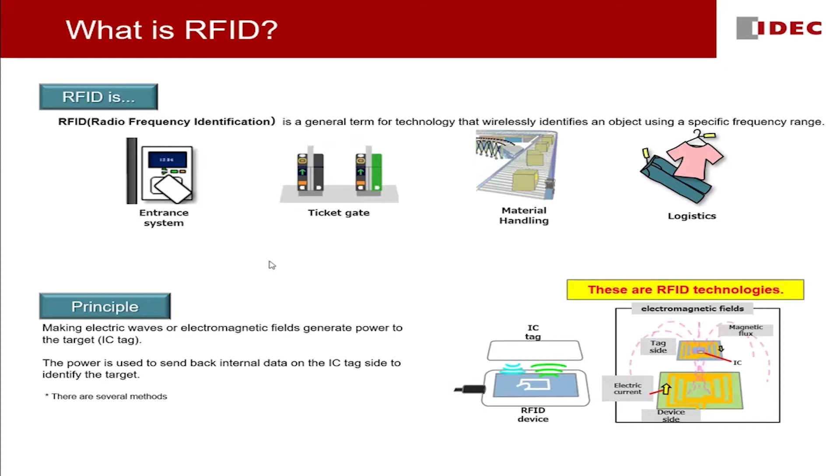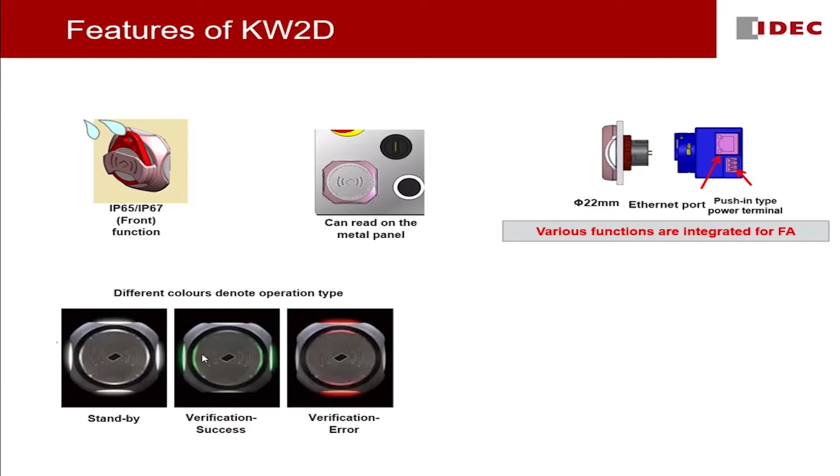The fourth feature is we have LEDs indicating the status of KW2D, that is whether it is on standby mode, or if I'm trying to place the identification tag or the RFID tag, it actually shows us the result whether it's a success or if there is any error. And it can be integrated with various factory automation products such as PLC and HMI with the help of the protocols which we have.

Coming to the specifications of KW2D, it comes in two models: one is holder type, the other is normal type. Holder means we have a dedicated kind of RFID tag, that is a key fob, that can be placed here for quite some period of time to identify the authority level of that tag.

The rated input voltage is around 24 volts DC with a power consumption capacity of 2.4 watts. It supports both types of cards: normal ID card and key fob card. A normal ID card can be sensed at a range of 0 to 15 mm, as well as the key fob type card can be sensed from 0 to 5 mm.

Communication protocol supported includes Modbus TCP, Ethernet IP, as well as CC-Link IE Field Basic. All these protocols work on an Ethernet base, so the connector will be of LAN cable, that is RJ45. Panel cutout is around 22 mm as we have seen previously. The dimensions are also of quite good range with respect to the front side or from the panel back end side.

Degree of protection is 67 from the front, altogether it's 65. We have a good range of mechanical performances as well with respect to temperature, humidity, pollution degrees and so on. Coming to the IEC standards, we are quite available in a few respective fields.

Coming to the specifications of RFID, I am just mentioning the supported tags or cards which can be detected by the KW2D RFID reader. These are the 4 types of RFID tags which can support our RFID reader. If you look at the communication speed, type A supports a speed of 106 kbps reading speed, while type F of this specific standard supports a speed of 212 kbps. Carrier frequency is around 13.56 megahertz.

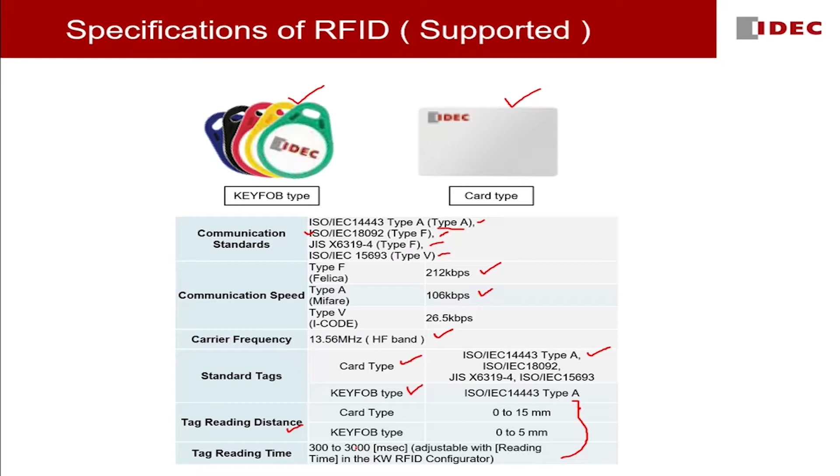Moving on to the configuration of KW2D with Ethernet IP, this is our major topic today. Ethernet IP stands for Ethernet Industrial Protocol. It works on an industrial multi-vendor network that uses Ethernet. So if you have an Ethernet port and it supports Ethernet IP, we can configure different Ethernet devices which support Ethernet IP.

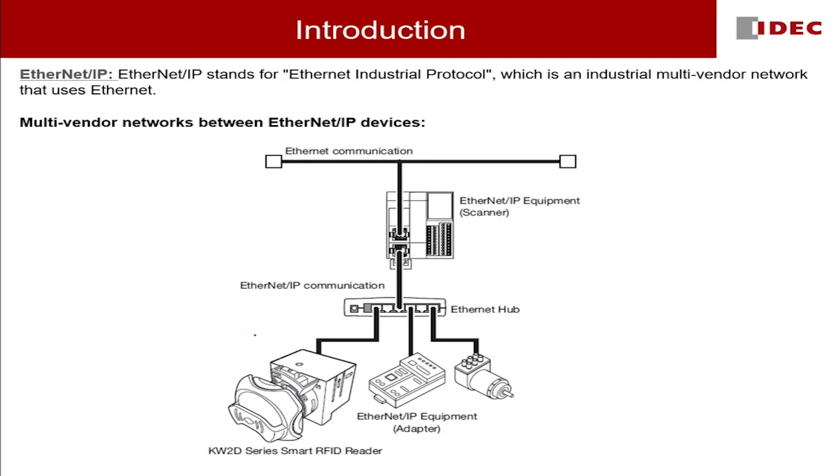So we will be going on through the practicals on IO communication function. As I mentioned, there are two methodologies with Ethernet IP adapters support, that is IO message communication target, which acts as target in our case, and the other methodology is class 3 UCMM communication.

Speaking of IO message communication function, it's a function that allows Ethernet IP devices to cyclically read and write data with each other. The target unit for reading or writing data is called a CIP connection point. Cyclically means it tries to read the data to and fro without any interrupt, meaning it's not a transient kind of communication wherein we have to give a signal to read or write the data. It actually does automatically.

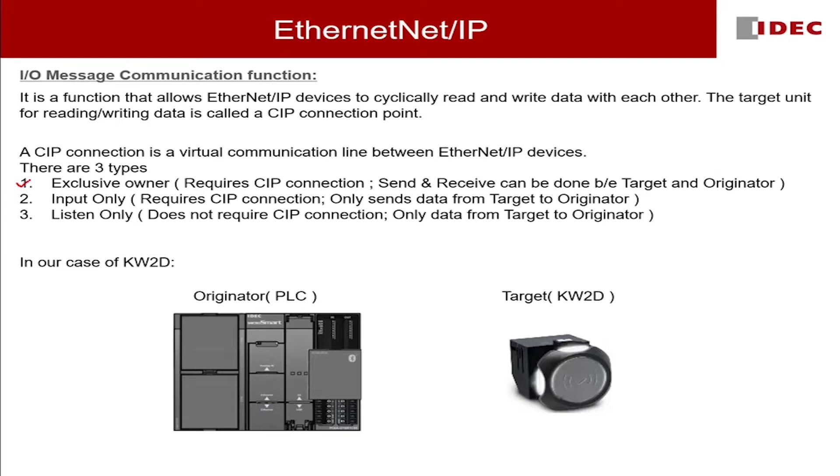In input only, if the originator PLC tries to read the data, it cannot send data back to the KW2D. Even in the case of listen only, we can only read the data from KW2D; we cannot write any command to the RFID reader. So in our example, we'll try to execute exclusive owner, which reads and writes the data to the target.

Coming to the memory assignment, we have to understand what kind of data can be transmitted or received from KW2D. As we have seen, the KW2D RFID reader is acting as a target, and here we are trying to receive the data. If we are programming in PLC, input assembly means the data is being transferred from KW2D to the PLC, meaning PLC is reading the data sent by the KW2D RFID reader.

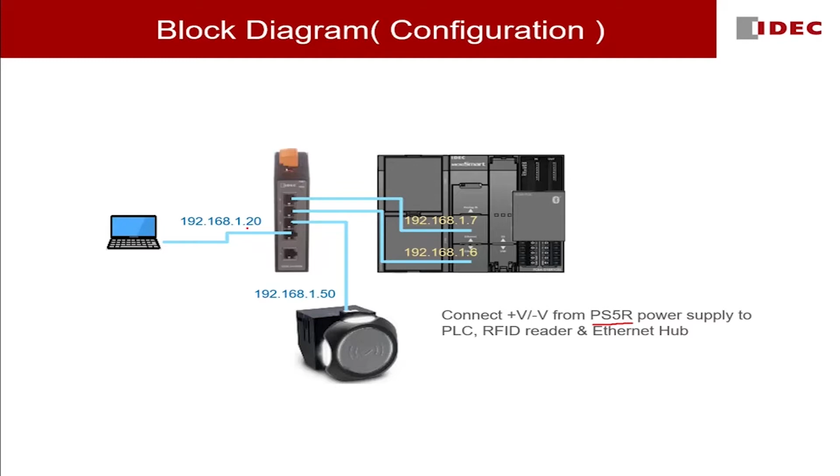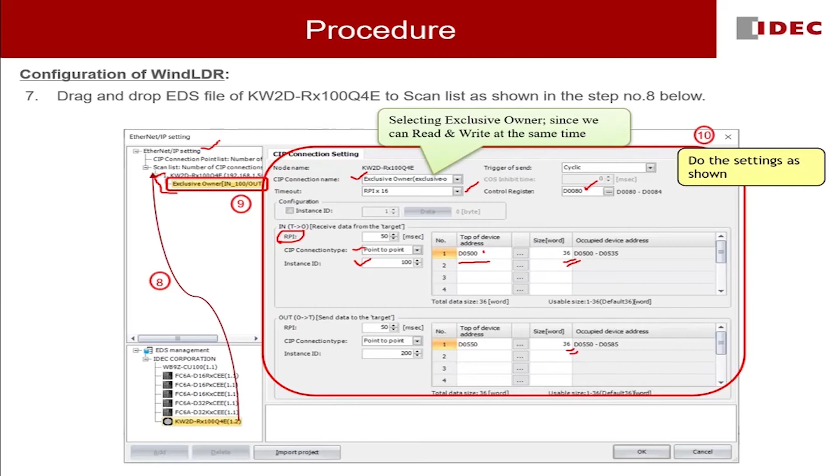So after doing all these settings, we have to click on Ethernet IP settings here, and check mark on 'turn on Ethernet IP communication bit automatically.' Once the communication is done between KW2D and the PLC, it actually turns on Ethernet IP communication. So this checkbox has to be checked, otherwise I will not receive any data from KW2D because Ethernet IP is not turned on.

So once we are done with everything, click OK for the Ethernet IP settings window as well as for the function area settings window, and then download the settings we have done. Since we have set the registers for KW2D reading and writing, 500 to 535 and 550 to 585 - the first is for reading the values, this is for writing the values.

So as a testing, we can go with batch monitoring or custom, wherein I was trying to execute the employee ID tag. I have read that, and as you can see, the UID 9255BDB2, which you can see in these registers, register number 507 and 508. If the tag length is quite big, then maybe it will go till here.

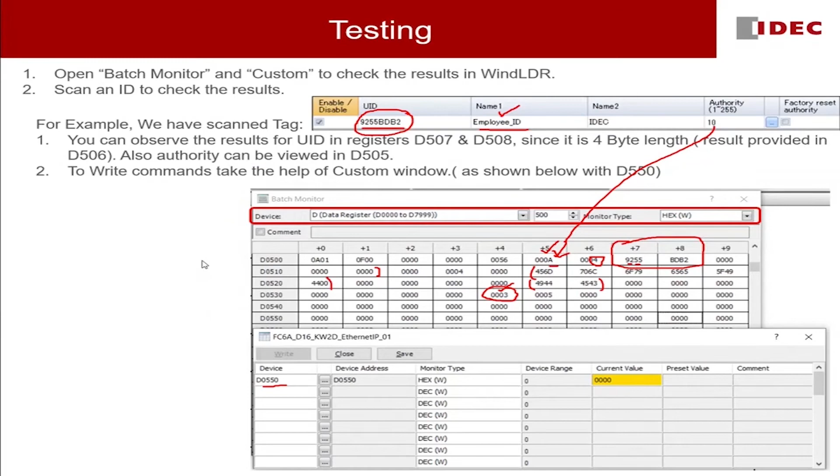Right, so let me just open the RFID reader in the configuration window first. Then maybe again we'll jump on to the configuration of KW2D with the Modbus TCP. So initially I'll be opening WindLDR as well as KW configurator.

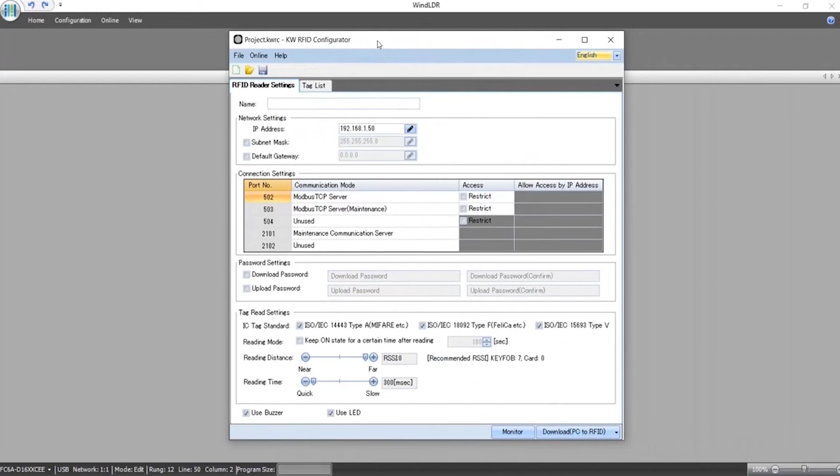Right, so let us set KW configurator first. So write some name - I am giving some name to it, EIP, the same name which I mentioned over there. By default, the IP was set as 1.50. I think we should go with new project. Nope. Okay.

But this is not a mandatory part to write name. Then we are going with Ethernet IP, right? Adapter. Click on this.

I will try and hold the data for 5 seconds. So I have written 5 seconds data, sorry. Then use of buzzer. Whenever I try and access the RFID reader, the buzzer will glow, and the LEDs will show its data. If green LED is shown, that means the RFID tag read is successful. If red is shown, that means tag read is not successful. That means it should present in the tag list.

So right now we do not have anything, but in detail it has some tags inside that. So what we can try and do is go to monitor once, 192.168.1.50. My PC's IP address is set to 1.20 initially before starting this presentation.

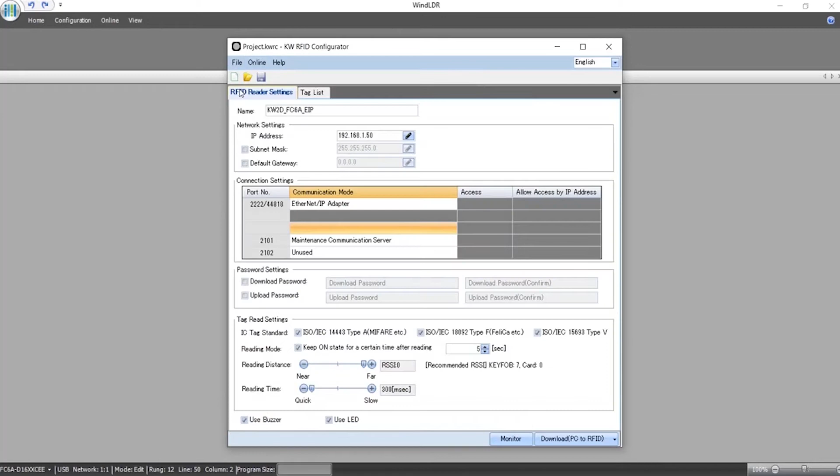So my IP address is 1.20, and the RFID reader IP address is 1.50. Initially I have said that if it is not set, we have to go online, upload the data from RFID to PC, check what is the IP address, change the PC address in line with that, and do the necessary settings, then write it back if the IP address is different. In my case, the IP address is set previously as 1.50, so I don't need to do anything.

So go to monitor, click the proper IP address for the RFID reader, click on connect. It says some data is present. I'll say no. So right now I am sensing one tag of green. So this is green tag, it's already present, so it will show the data.

Its name. This is yellow, and authority levels are already set in the reader, so it will show. Otherwise, what we need to do, we have to reset it once again. So there's one more tag, maybe I'll try and read. Okay, this is employee ID, which is already present. If these are not present, you'll not be able to see the authorities or names which are provided here.

So once all these are done, click on save registered UID tags. Otherwise, I'll do one thing, reset the IP factory settings. 192.168.1.50. Execute.

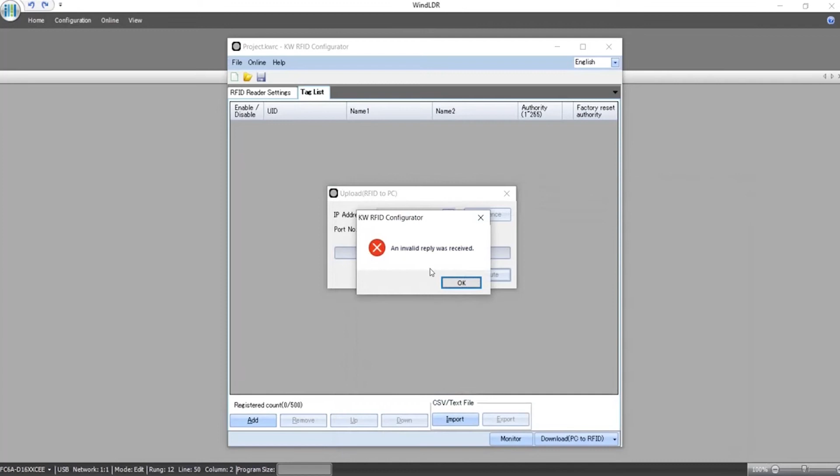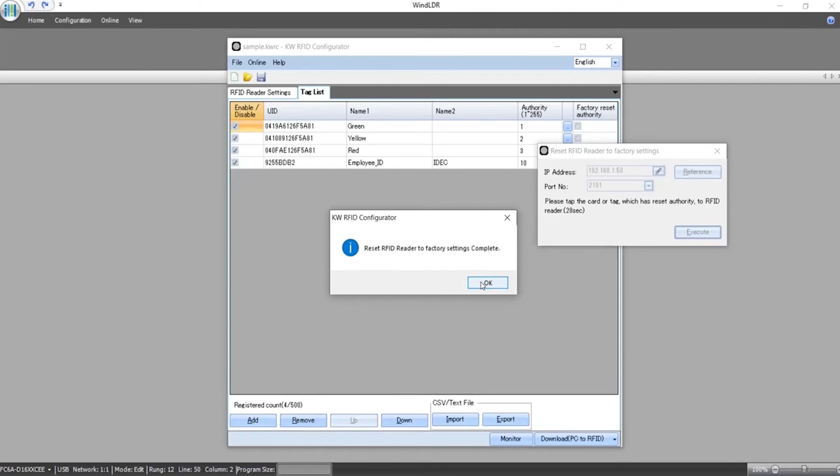Okay, so factory reset, actually I kept it as red. That has to be changed, that has to be configured here. So reset factory settings, execute. Okay, now it has come to factory reset settings. Everything is back to normal.

So I'll try and reopen KW configurator, or else I would have gone for new file, new project, KW2D. Right, so 1.50 is the IP. Maybe I have to change it to Ethernet IP.

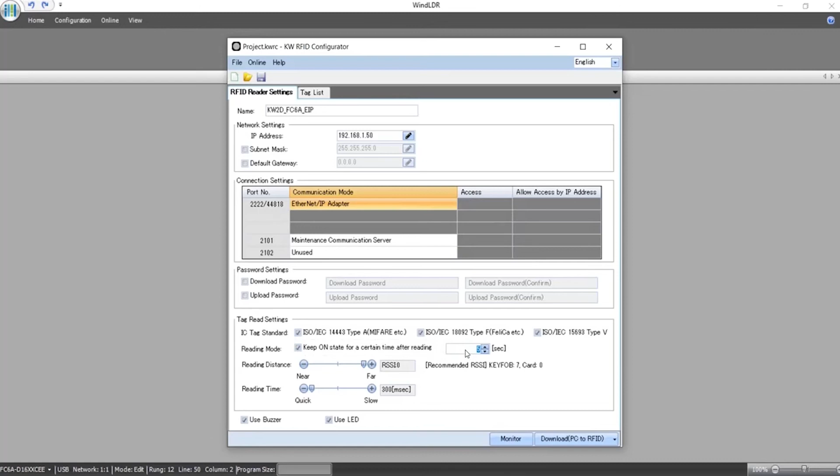Then 5 seconds, use buzzer. Maybe I'll use the buzzer. Since no tags are available, monitor, connect. So by default, the IP address of the RFID reader is 1.50. So I'll go with green key fob, then yellow,

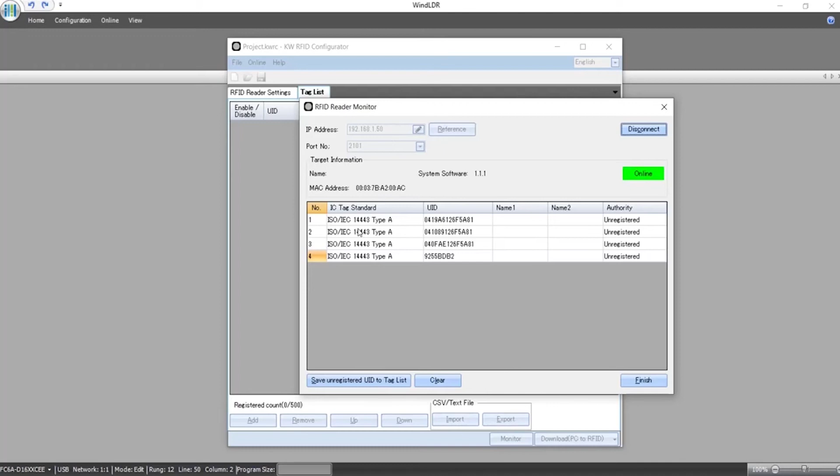okay, then red, and then the final tag, it is employee ID. So since these are not registered, save the tag. Yes.

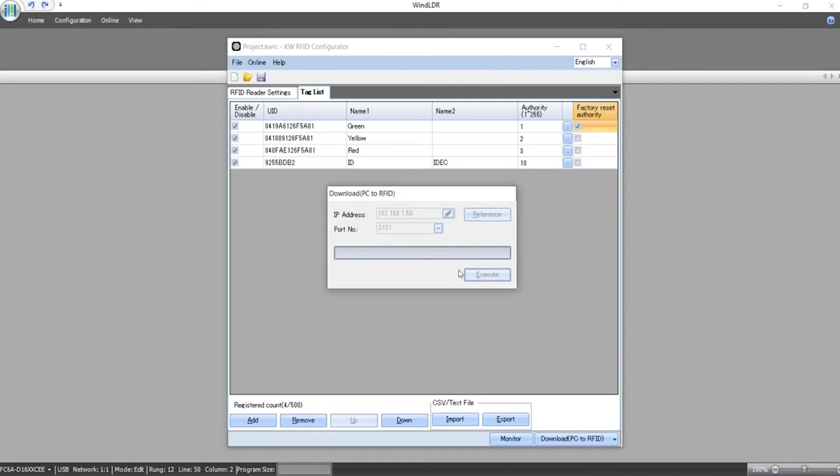Okay, for factory reset, again we have to give some tag authority. Maybe I'll give it to green, so that whenever I'm pressing factory reset, the authority who is having the green can only do these factory reset settings. So once these settings are done, click on download either from here or from here. Okay, all settings, execute. Okay, done.

Then now these settings are done, so we'll move on to the WindLDR. So in that, close it, go to the selection of PLC, select the necessary PLC over here, right? So I'm going with FC6A-D16XXCEE.

Then you have to go to the configuration window. We have to click on Ethernet IP1, Ethernet port 1. Settings, maybe we'll go with the same settings which you have done in the presentation. 192.168.1.7 for Ethernet port number 1 and 1.6. Okay. And finally check on Ethernet enable, configure.

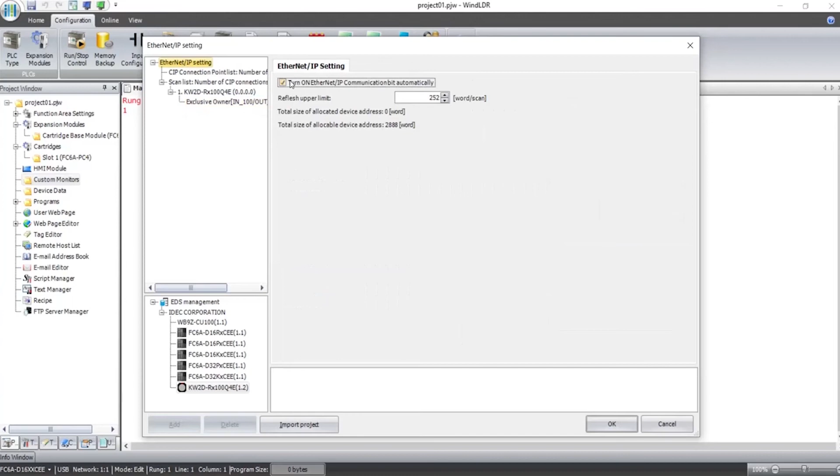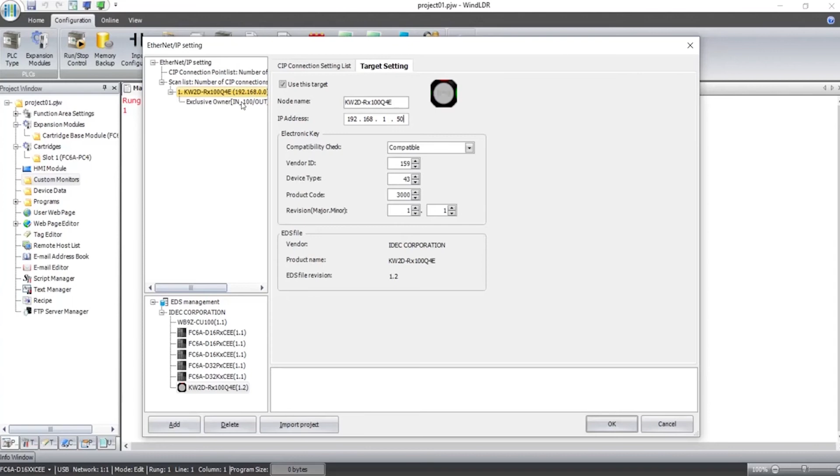Drag and drop the KW2D from here to scan list. Initially we have to turn on the Ethernet IP communication and go to KW2D, the exclusive owner over here, KW configurator settings. So here, which I forgot to mention in the presentation, we have to mention the IP address 192.168.1.50 for KW2D reader. Then exclusive owner, by default it's exclusive owner, so it has 100 and 200. If you are going with input only, it will change automatically, we don't need to do anything else.

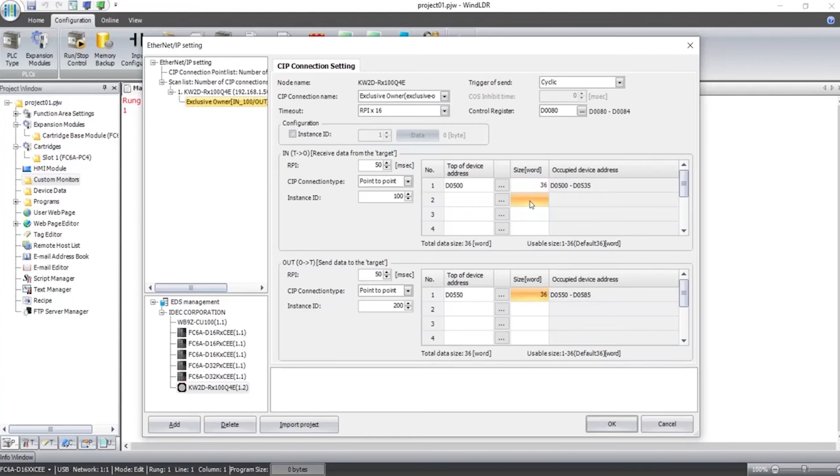So I'll go with exclusive owner, cyclic, maybe some register D80, the same one I've taken in the presentation, D500, D550, altogether maybe 36. Same value has to be entered here, 36. I'm taking all the register. So click on OK, OK, and we can download the data.

So I'm using communication as a USB here for fast communication. Otherwise, we can go with Ethernet also. You can specify which port we are going with. So okay, I'll try and use the first port.

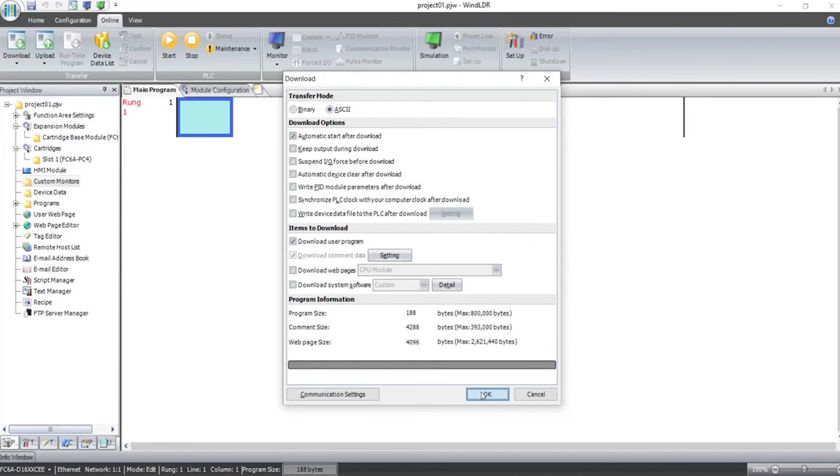Okay, it's transferring the data to the PLC. It's downloaded successfully. Let us go and monitor now.

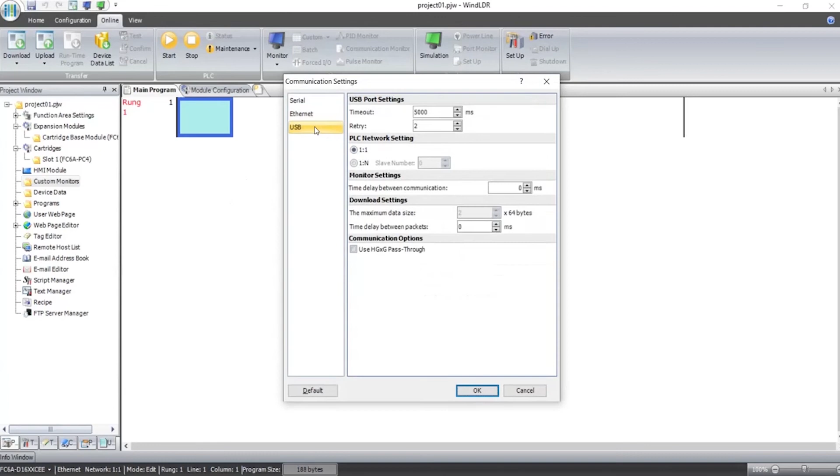So first, for fast monitoring, I'll do one thing. I'll change the settings to USB. My PC is also communicating with USB. So let us check the register D500.

I'll be scanning the employee ID tag which I have. You can listen to the sound. It's a 4-byte, 9255BDB2. Let me just take it out. After 5 seconds it comes back to normal because I have given a time of 5 seconds.

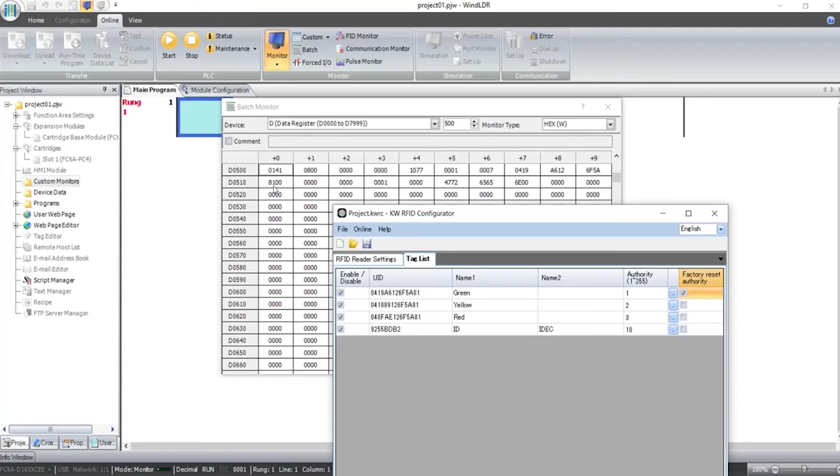Let me just put in the green tag key fob. It has 7 bytes, 0419 A6. You can see here it's the same number, 0419 A6126F5A81, a 7 byte value. Maybe you can do the programming to take only 7 bytes. So I have taken the key fob out from there, and it has come back to normal.

Let's say we write some value into it. The register which we took was D550, right? So now what we need to do is I need to enter the hex register value of that.

I'll go back to the PPT once again. Let me just check what we can do. I'll try and stop the RFID command, that means it will not read any value. So let me just click and write one over here.

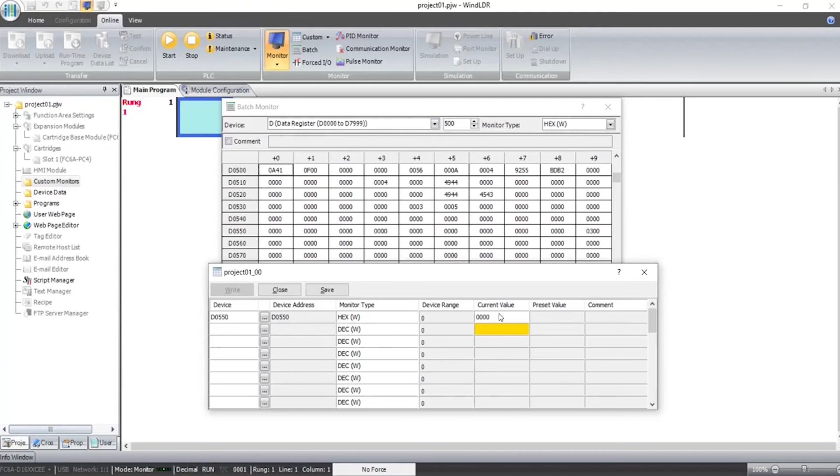So I'll put the tag on top of the RFID reader. As you can see, there's no value coming up here. Let me just put the tag there in the same way. Now the tag is on top of the RFID reader in front of it, and it's reading the value. You can see even the name as well here.

So to check the name, we have to check the ASCII ID, and here at 525 we have ID EC. This is the register which we have. This is going in line with the registers which I have shown you here. 15 to 23 is name 1, 25 to 33 is name 2.

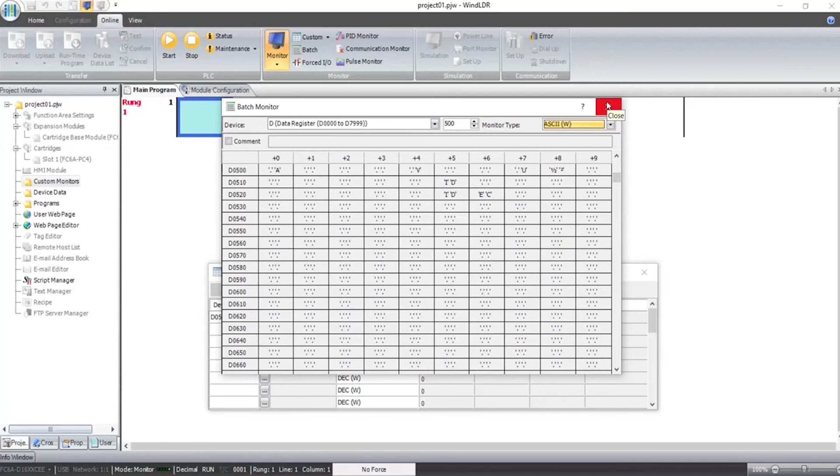I think that is done for Ethernet IP. The remaining configuration, the PLC programming can be done, because once we have received the data, we can play along with it. So let us move back to the presentation.

For the Modbus configuration, it's quite simple for Modbus TCP. The requirements are the same as we have seen earlier. IP addresses are also the same. Settings are also the same with respect to KW2D, but the only thing is we have to change the communication settings of Modbus settings to Modbus TCP server, and the remaining settings which we have done in the Ethernet IP are the same. So if someone's referring to this specific video, maybe they can go a little bit backward and check the KW2D configuration, how we have done that.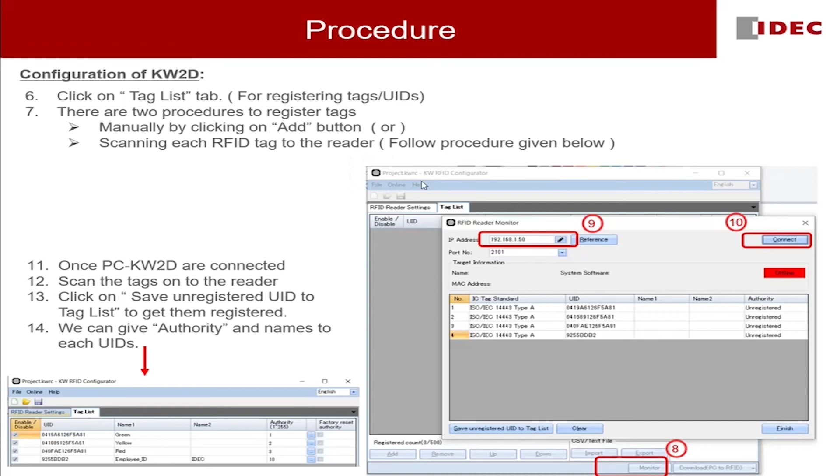In the PLC also, the configurations are quite the same till step number 5. In step number 6, we have to open one more selection called communication settings. Once the communication settings has been opened, there we need to click the first connection, set it as Modbus TCP client, and click on configure. Once we click on configure, a window will open wherein we try and set the functionality codes as read the status or write the status.

This is actually writing of status, not reading of status. I'll change it in the example which I'll be showing later. After that, we have to set all these as per what is mentioned here - bits and words, how many bits and sizes: 32, 16 and 32. These have taken all the bits and words which are mentioned in the manual. So I'm targeting all the bits and registers which can be read or written to the KW2D.

So again, Modbus slave address we have to set as per the read input status, write input coil status, or reading input registers. According to that, we need to set. So I hope whoever is using Modbus TCP, if you're trying to read with KW2D, definitely you have to go with these settings only. Then slave number is 1, we have only one slave, and the host we have to set, that is our host is KW2D because we are setting from PLC.

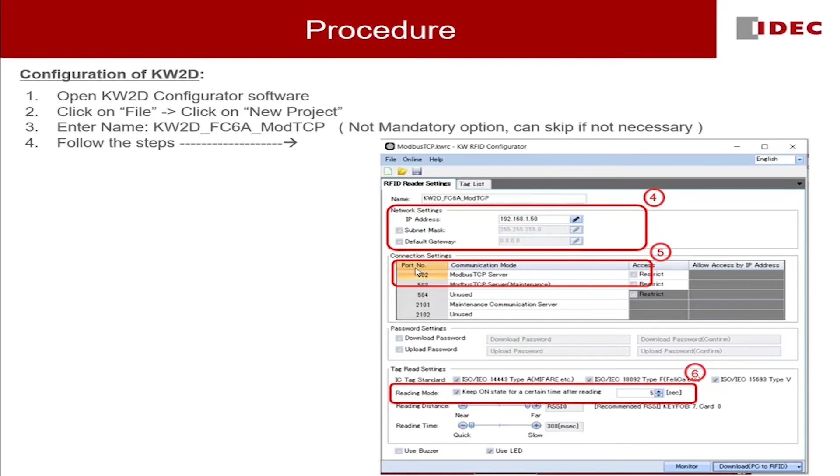Modbus TCP actually communicates from Ethernet port number 1, so we have to set port number 1 with the KW2D IP address. Port number I'm not changing here. For the host, port number is 502, which you can see here in the KW2D configuration. By default, port number comes as 502, so we have to write down the same port number.

Okay, just after doing all the settings, click on OK. Enter the IP address of KW2D, and finally click OK, whichever window is open, and straight away go online and write the settings back to the PLC.

For monitoring, as we have taken M0, M50 and M100, so as you can see here, for reading the inputs and writing the coils, it's actually write. We have to take a different functionality code over here to write. I'll be showing you in the example. Read input registers D100 to D131.

So for testing purposes, again I've taken the same tag as an example, which I've taken for the Ethernet IP. We can get the UID data over here. You can see the UID 9255BDB2, which is being received in D103 and 104. Again, employee ID and everything will be received from here.

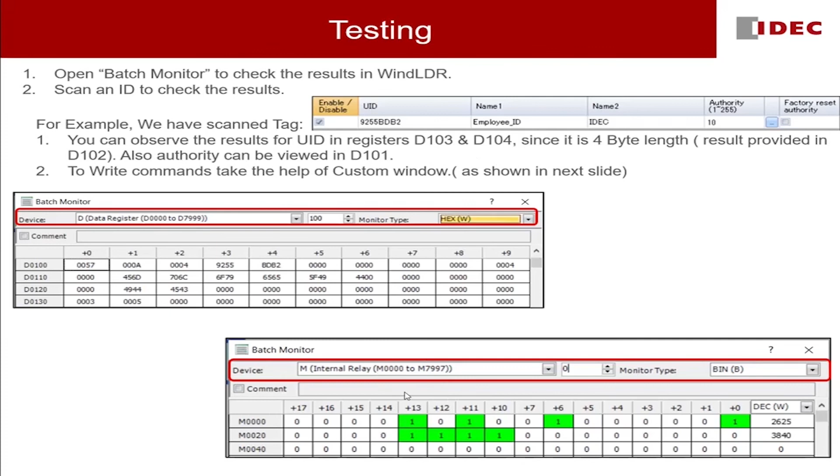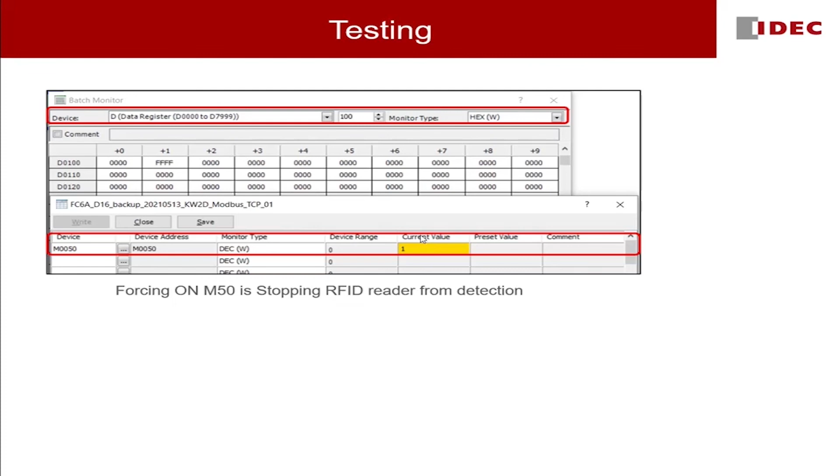D111 to D116, because it's an employee ID. We can even monitor the status signals like M's and all. Then we can even try and force on or force off the commands, that is M50.

Let me just open the WindLDR screen, and I will again set the settings. Maybe in place of EIP, I'll write Mod TCP just for my identification. IP address, I'm putting it as the same. Here I have to change it to Modbus TCP server. The remaining settings are quite the same; I'm not changing any other. I'm just changing the methodology of communication.

Online, download, all settings, execute. It's done. Now the RFID reader KW2D is working as Modbus TCP server. Going back to the WindLDR.

Go back here, Ethernet IP port number 1. Port number 2 I set is Ethernet IP, right? So I'll just unconfigure it. Now port number 1 is set as 1.7. Port number 2 IP address is set as 1.6.

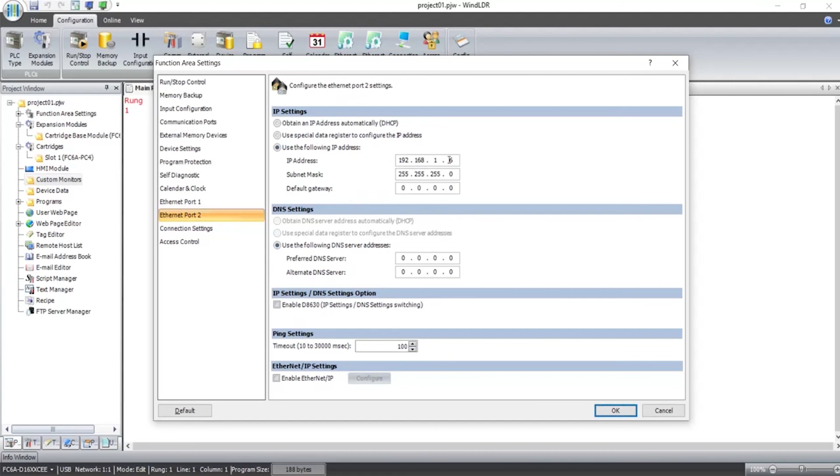Go into communication settings; this is for Modbus TCP. Drop down the first connection. If you're having multiple, just go with whichever is flexible for you. Right now I do not have any other settings, so I'm going with connection number 1, Modbus TCP client, because KW2D is acting as our server.

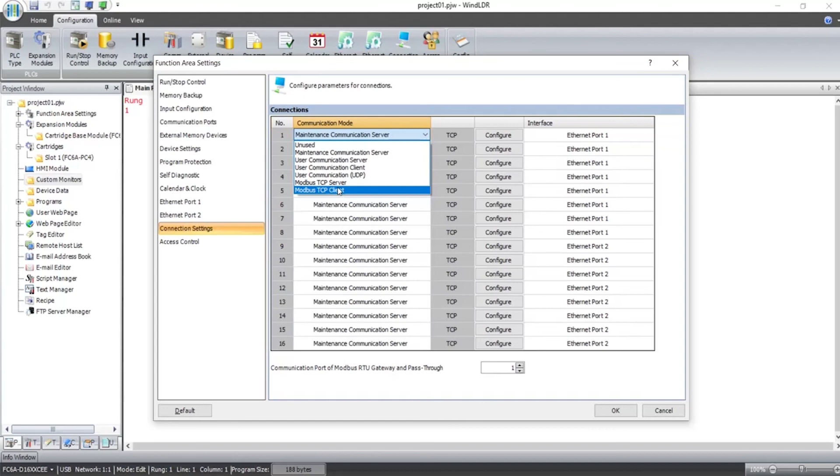As soon as we do that, this window opens. Otherwise you can click on the configure button over here. Here, read input, write, force multiple coils - instead of reading coils, I'm writing the coils, and read input registers. So I'll just go back and refer to what I've set over here.

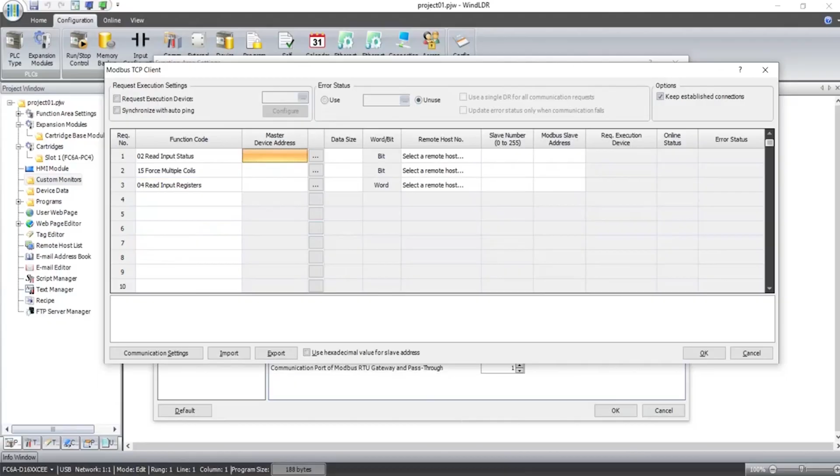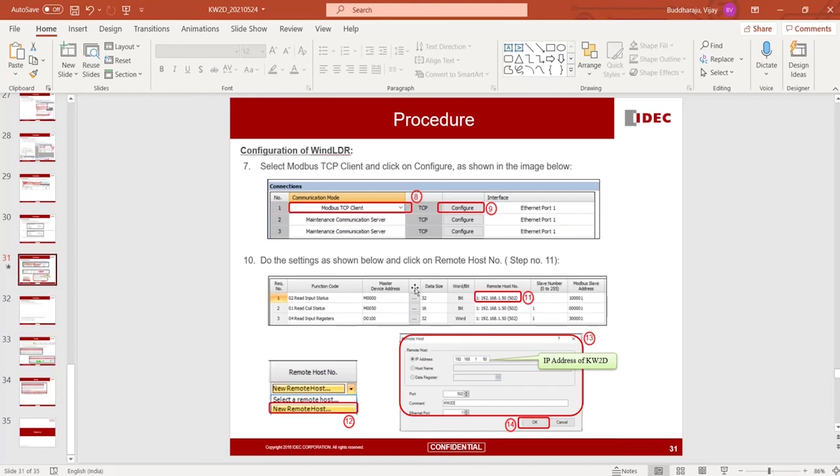I'll set the same things, M0, M50, D100, which are free as of now. Sizes are actually referred from the manual. I'm taking all the sizes, complete registers which are available in KW2D for reading and writing: 32, 16, 32. 32 bits for reading bits, 16 bits for writing, 32 registers for reading.

Slave number 1, we have only one KW2D reader which we are targeting. Modbus is quite important; we have to configure the same - that is 1, 4 times 0, 1. This is only 1. This is 3, 4 times 0 and 1. This is quite important. We have to set the same starting address, Modbus address, in the slave - that is, slave means in our case KW2D.

So host also we need to set. Click on new host. 192 - this is the RFID reader IP address. 50, port number I'm not changing. Just write KW2D for understanding - it's a KW2D we're targeting. We have only two ports, right? 1.7 and 1.6. I'm using port number 1; I have to use port number 1 for Modbus.

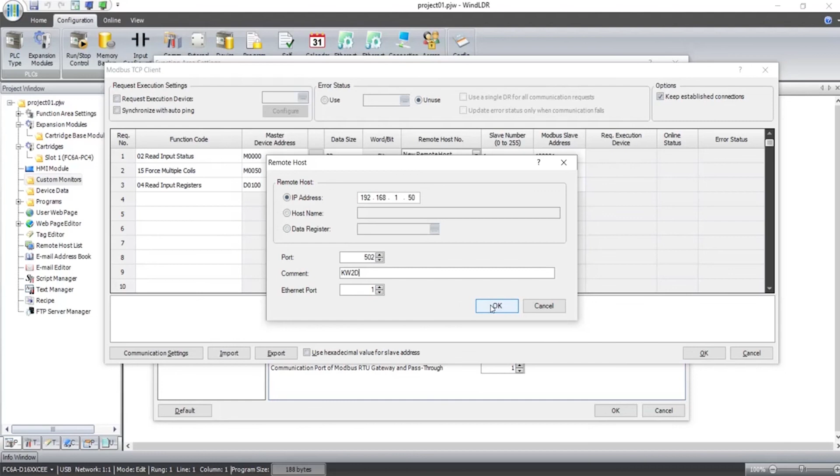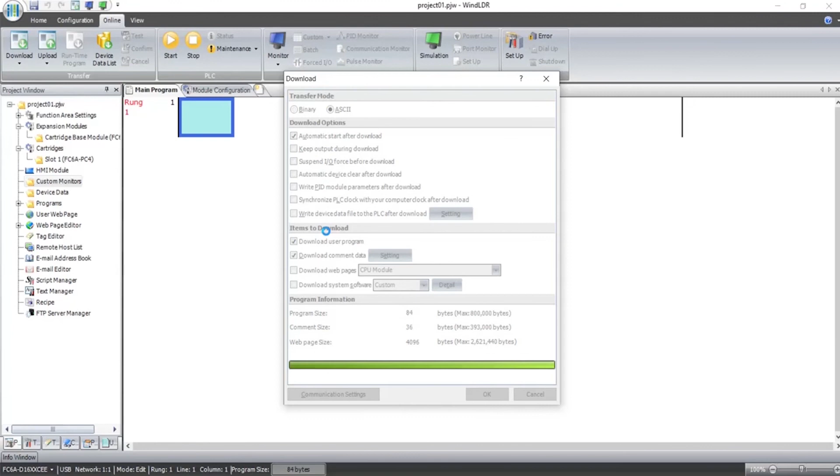Click on OK. Already I've set the settings, so just need to drag and drop. Click OK. Settings are done. Now we just need to download. So it has been written, and CPU is healthy. Just monitor - let us monitor the register.

I think we are targeting D100, right? I am just putting up the data tag. You can see 9255, same tag. Let me use the key fob tag, yellow.

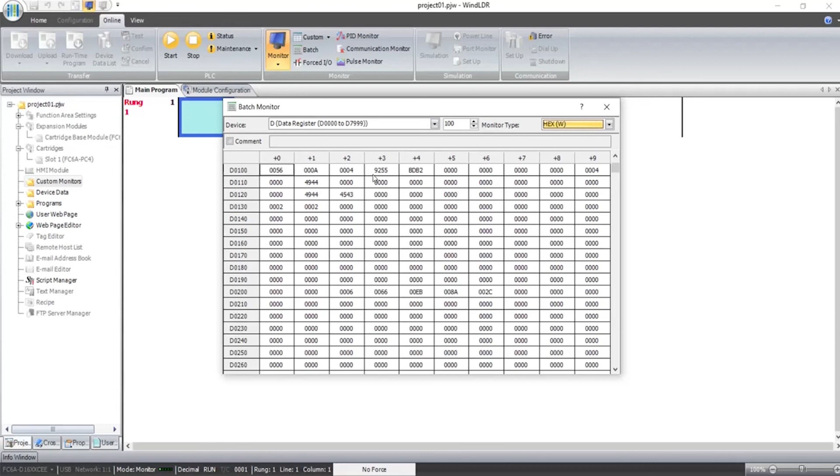Okay, this is yellow, to check the ASCII - yellow. Okay, I'll go with red. Red - this is the red tag, key fob tag. So this is how we can check.

Even we can check the status of the bits, and we can even force on to disable the RFID reader. So it's quite similar to what we have seen in the Ethernet IP address protocol.